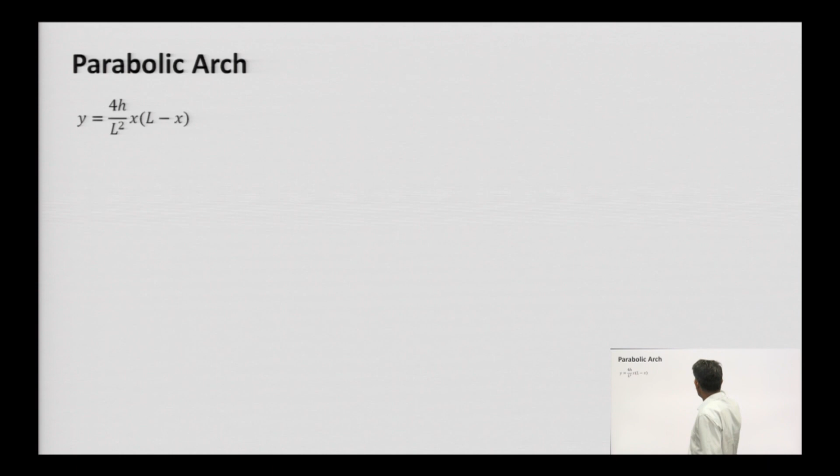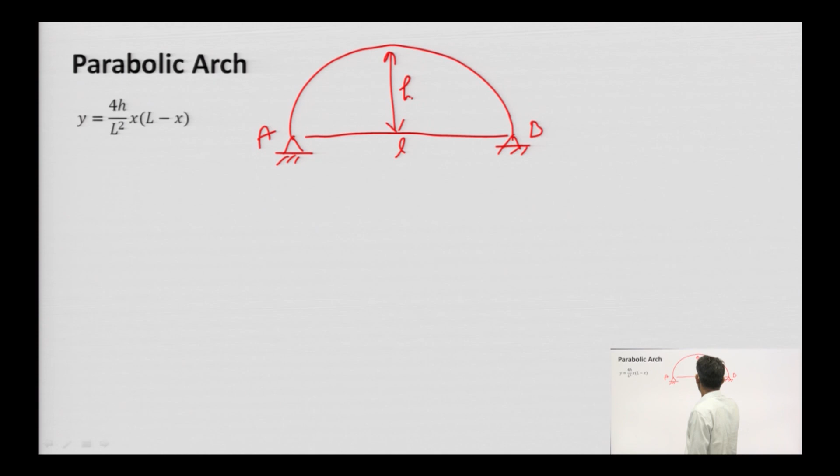So say this is point A, point B. Horizontal distance is L, and this is the rise at the crown, H. At any point P, we have x and y, where x is horizontal distance and y is this distance. The equation between x and y will be this.

So the slope at any point theta can be calculated. dy by dx gives the slope, and its value is 4H by L square, into L minus 2x. So by putting the value of x and y, we can calculate the value of theta.

This is tan theta. If theta is small, then tan theta is equivalent to theta. So by taking tan inverse of this, you can calculate the value of theta.

Another thing is that if the levels of the parabolic arch are not at the same level, meaning if the situation is like this, then in that case...

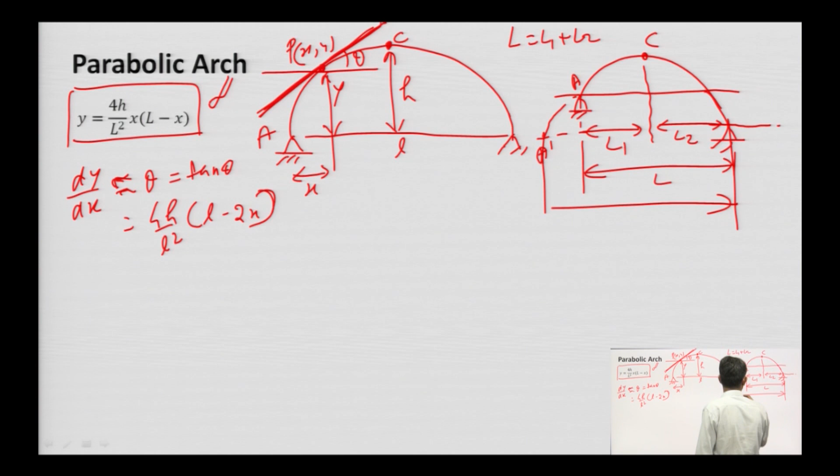So this distance will be 2L2. And say this point B, say this point is B dash. So what is this distance? This distance is 2L1.

Everything is same, but we need to take care in calculating the ordinates. Suppose we need to find that value of y, then in this equation what will be the value of L?

In this equation the value of L will be 2L1. If we need to find the value of y from this other side, from B, then in that case L will be taken with origin at B.

If we use L as 2L1, it is better to use this. And L1 and L2 can be calculated.

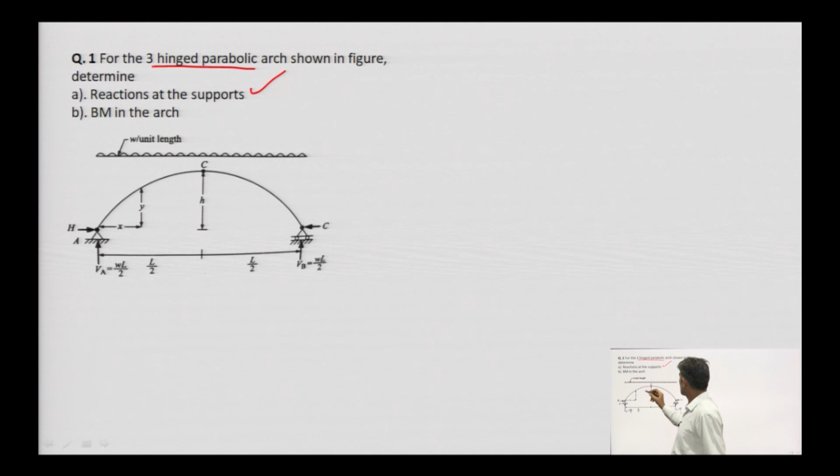Let us calculate the support reactions at the support and bending moment in the arch when our arch is a 3-hinge parabolic arch. 3-hinge parabolic means the relation between x and y is y equals 4H by L square, x into L minus x, that we have.

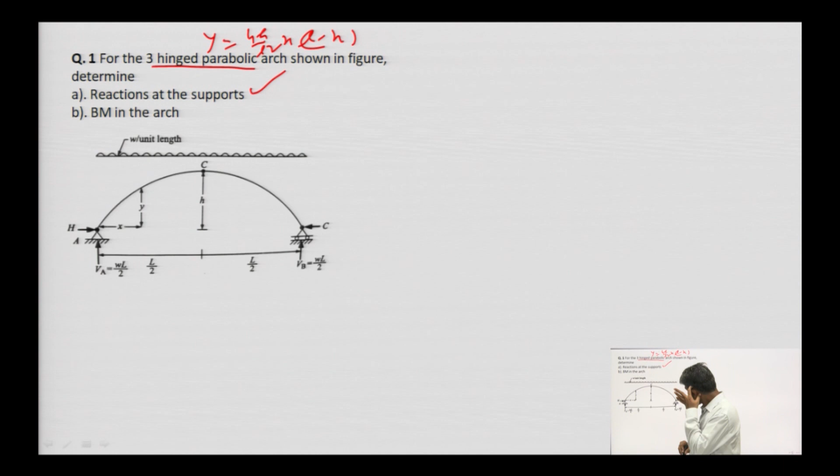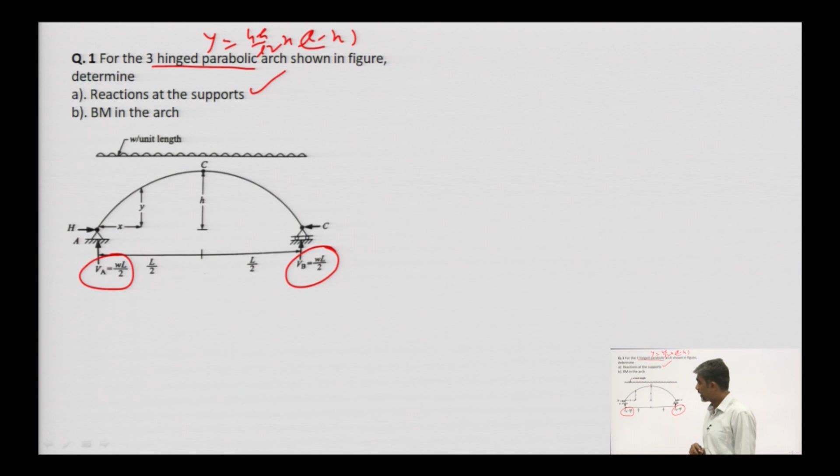Okay, so in case of UDL, when it is covering the entire span, reaction due to symmetry, VA and VB both will be same and it will be WL by 2. Horizontal thrust at A and B,

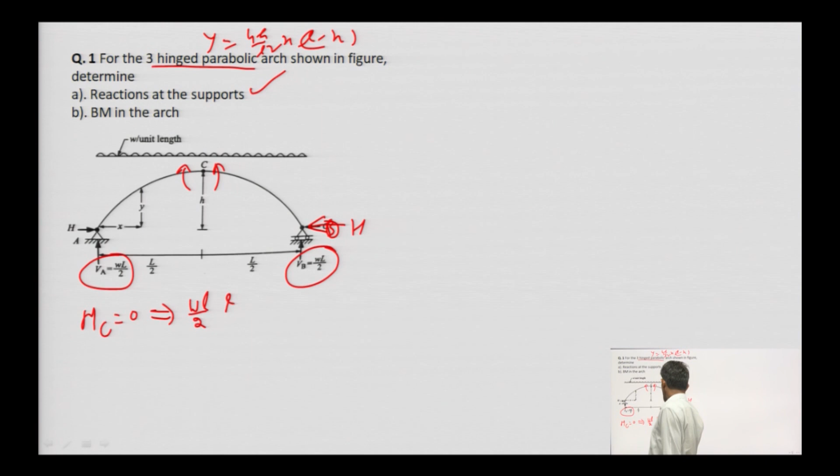So say small h is equal to 0. So capital H is equal to WL square by 4, this is 8, divided by H. So this is the value of horizontal thrust. H is equal to WL square by 8H.

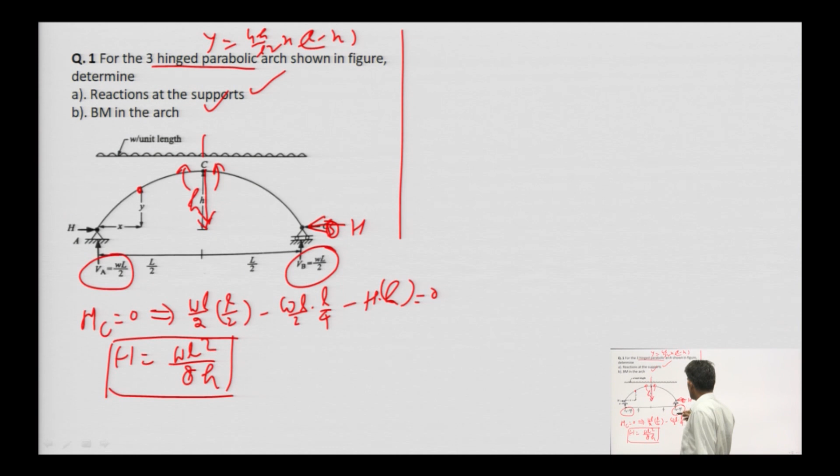And bending moment at any point. So reaction at the support we have calculated. If you need to calculate the total reaction, take RA equal to under root VA square plus H square. Similarly RB will be VB square plus H square. Find the inclination between total reaction and VA and H.

So next thing is the bending moment in arch, bending moment at any point P, x comma y. At this section, VA into x, VA is WL by 2 into x, minus another load of UDL, Wx into x by 2, so it is Wx square by 2.

This is the bending moment minus H into y. H we have calculated, WL square upon 8h, that we have calculated, H into y. Y is this one. So by putting this value, we will get WL by 2 into x minus Wx square by 2, minus here WL square upon 8h into y.

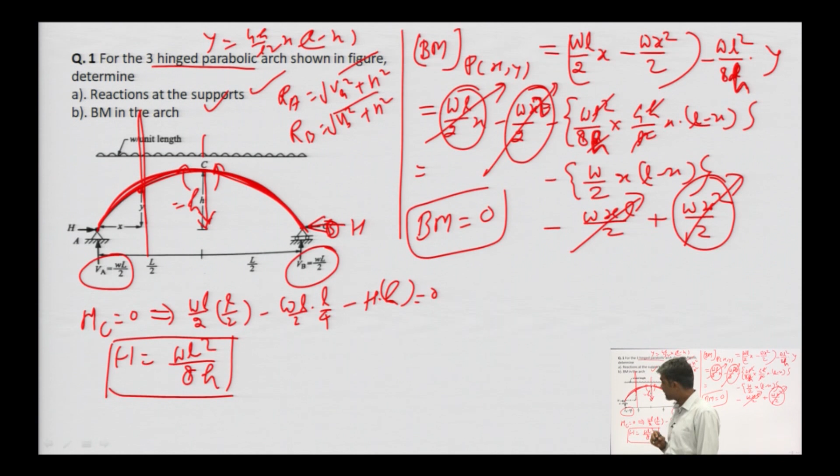It is not Wx cube, it is Wx square. So this is going to cancel out. So what is the bending moment? Value of bending moment is 0. It means that in case of parabolic arch, bending moment at every section is 0 if that arch is loaded with UDL. If the entire span is carrying UDL, then no point will be subjected to any bending moment.

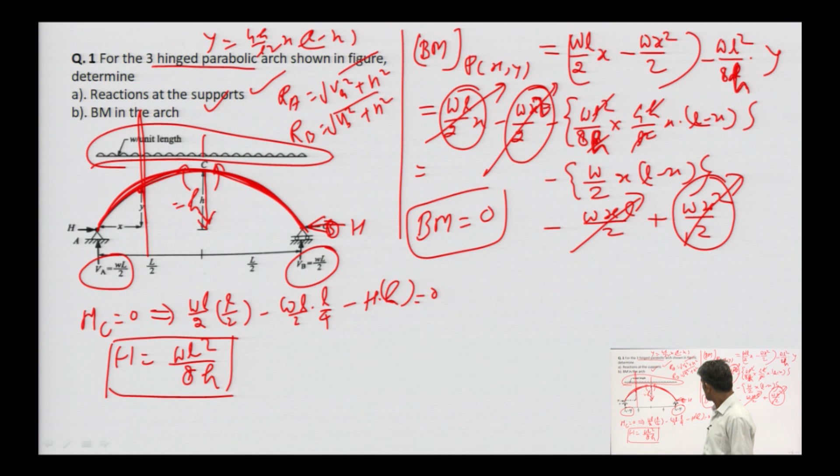Next, in this case, we need to calculate. A 3-hinged arch is given to us: rise 4 meter, horizontal distance L is 24, and the load system is this one.

Let us calculate first of all the support reaction. So, support reaction, equate sum of bending moment at point A equal to 0, that gives the value of V A. So, the value of V A into 24 minus 50 on perpendicular distance with respect to A, it is 18, minus 30 into 12 into 6, and that equals to 0.

Because h is not going to enter here, since it is at the same level. So the value of V A can be calculated. Value of V A is 282.5 kilo Newton.

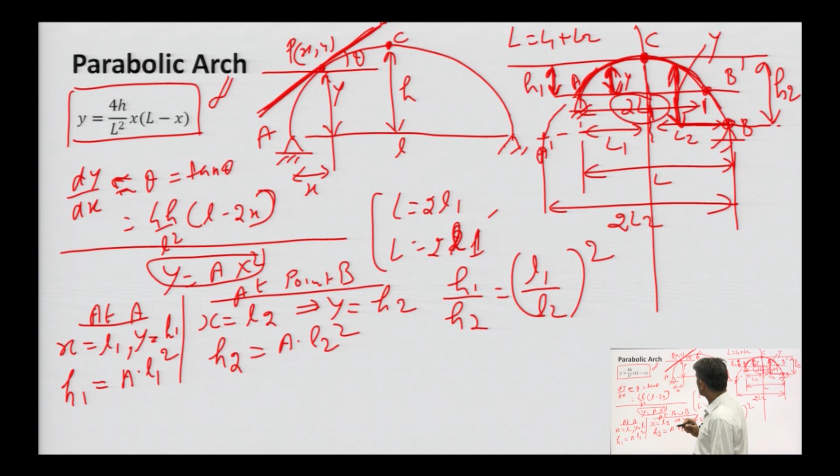So we will use the equation of the parabola: y equals 4h upon L square, into x into (L minus x). So the value of y at this point - considering point B as origin, the value of x in this case will be how much?

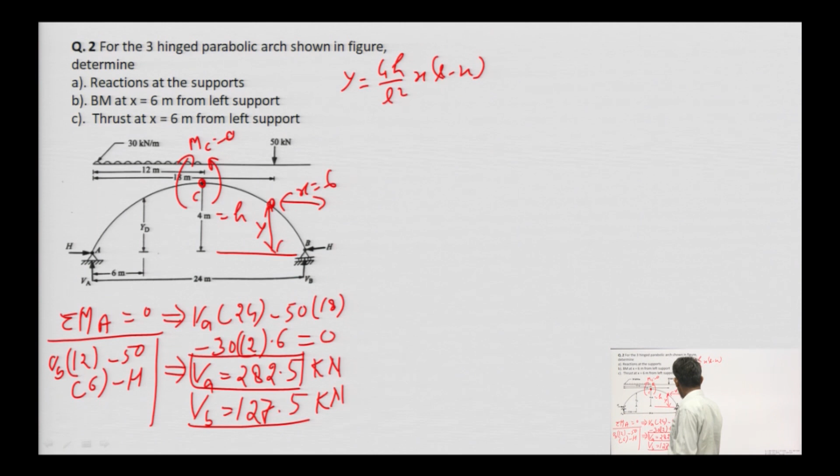It will be 6, and L is the same. So by putting this: 4 into rise 4, upon L square, L square is 24 square, x is 6, and L minus x, 24 minus 6, means 18.

So this value, YD value, comes to be how much? YD can be calculated as 16 divided by 24 square, multiplied by 6 into 18, that is 3. So the y value is 3, the ordinate is 3.

So by putting the value of y as 3, we can calculate the value of h, and h value comes out to be 307.5.

So we have calculated the support reactions. That part we have completed. The next thing is bending moment at x is equal to 6, meaning this part here.

At x is equal to 6, we need to calculate the bending moment. So bending moment M, that point is D. So M D is equal to V A into horizontal distance, how much?

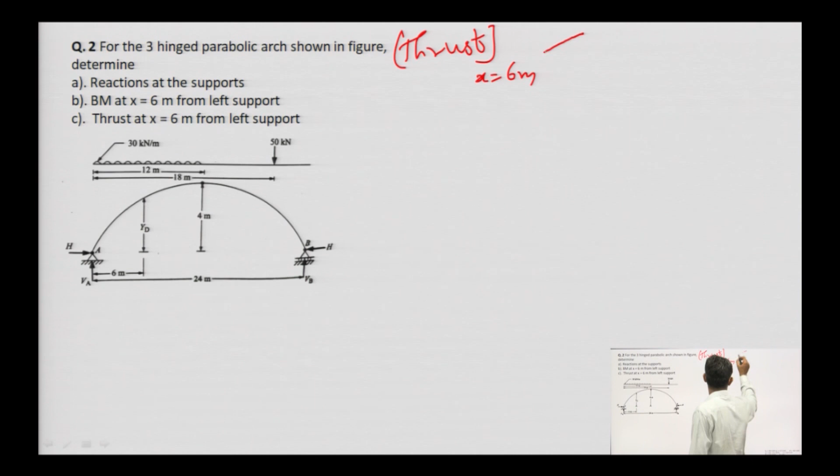So what we are going to calculate? Thrust at x is equal to 6 meter. So it is normal or radial, it is normal or radial, okay, and this is Q. So first of all we need to find the value of the slope at this point.

And theta is equal to tan inverse dy by dx. Since we have y is equal to 4h by l square into x into l minus x. So theta is tan inverse, theta is equal to tan inverse dy by dx, and dy by dx is at point P. So it is tan inverse 4h by l square, x is x at x. Okay, what we are, dy by dx.

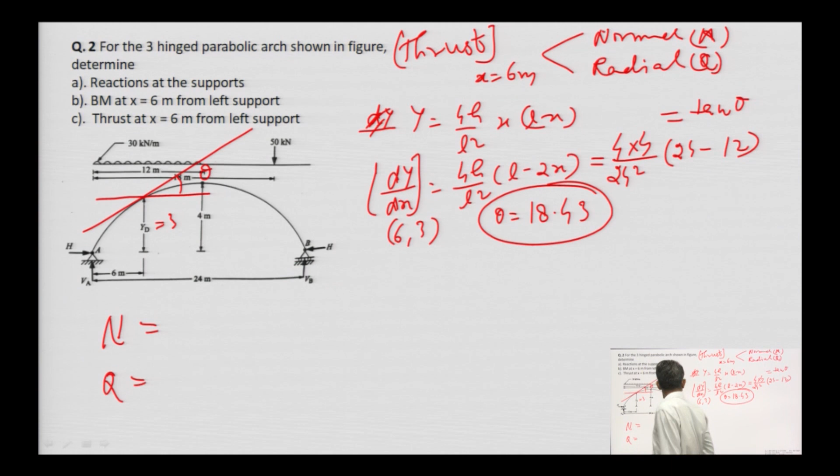After calculating this, we can calculate the value of normal thrust and radial thrust here. So what will be normal thrust, value of normal thrust and value of radial shear, N and Q. First of all, to calculate this value you need to make the free body diagram for this one part.

Make the free body diagram for part AD. Let me erase. After making the free body diagram, we will first calculate the vertical and horizontal force at point D, then we will resolve the forces along a section which is along the section, and perpendicular to it.

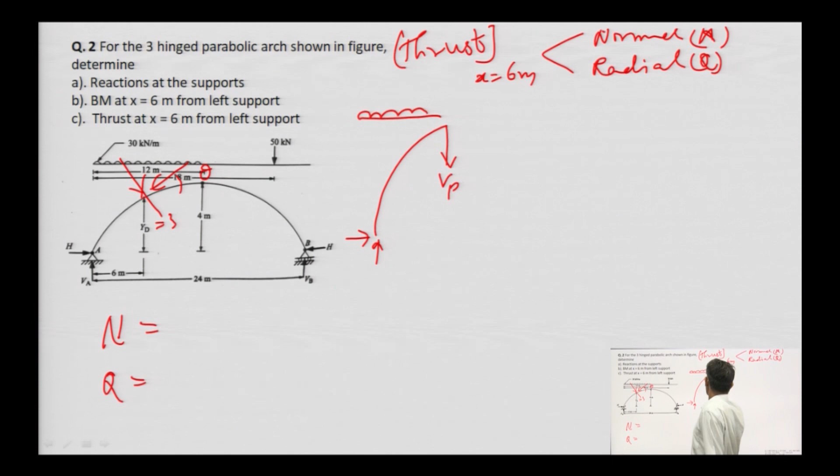Making the free body diagram, we have vertical reaction Vp, and this load UDL. So value of Vp, and here it is H. Value of Vp will be what? Value of Vp, here it is Va, it is Va minus W. W is 30, 30 into x, x is 6, so this is the value of Vp. And H, it is H is same as 307.5. So resolve these forces along this and along this one.

Since we know the value of theta, so this is also theta. If this is theta, then this is also theta. So the vertical component of Vp along this axis, it is Vp cos theta, and the component of H along this, it is H sin theta. And similarly the component of Vp along this side, it is Vp sin theta, and this one it is H into cos theta.

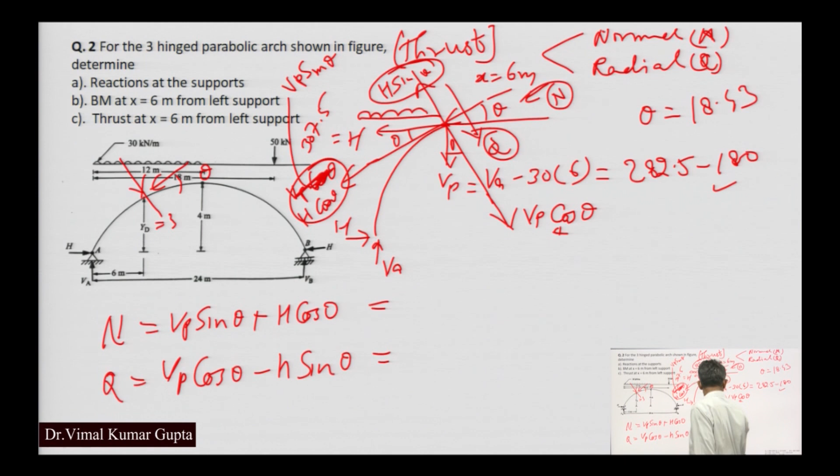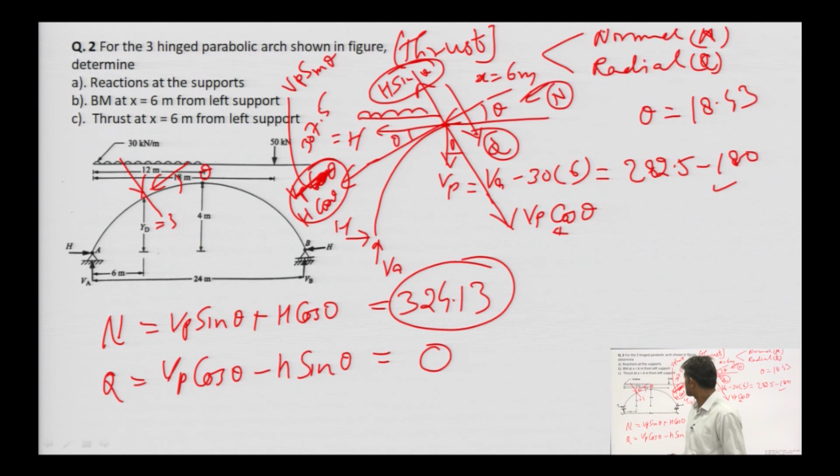Theta is known to us as 18.43. Vp is known to us, Vp is 282.5 minus 180. So H is known to us. So by putting the value, we will calculate the value of N and Q. So value of N is 324.13, and value of Q will be 0 here. So these are the results. References. Thank you very much.